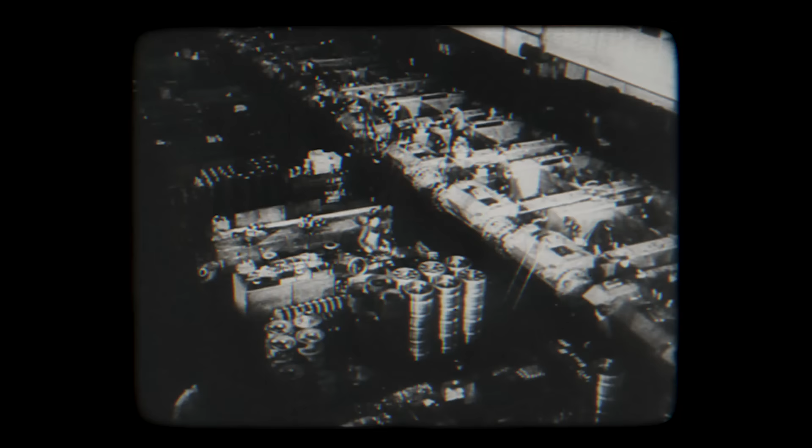The Panzer IV proved itself to be upgradable, ensuring it was still extremely potent and relevant in the conditions of 1944. Now let's take a closer look at the differences between them.

The first thing to think about is armour, and that represents one tank's ability to survive a hit or multiple hits from another. When you look at the shape of the two tanks, obvious differences hit you. The Panzer IV is quite boxy, whereas the Sherman has sloped armour on the glacis. The thing to remember here is that the Panzer IV is a pre-war design. The original spec goes back to 1934, and sloped armour, which not only increases the line of sight thickness of the metal itself, but also increases the likelihood of a ricochet, isn't widely adopted until later.

In fact, the Panther is the first German tank really to use it. The earliest model, Panzer IV Ausführung A, was pretty thinly armoured. This is actually an Ausführung D, but it's been fairly heavily upgraded, so it's not much different to the Ausführung H, the later model, which is the one you'd most often encounter in Normandy.

Now, this tank originally had 30mm armour on the turret and on the glacis, but it's been beefed up. There are multiple Vorpanzers on the glacis, there's applique armour on the hull, so actually it's a much tougher nut to crack. It would also have had Schürzen, skirts, or I think in German it's more properly aprons, around the turret and also along the sides. They, I'm afraid, are now missing.

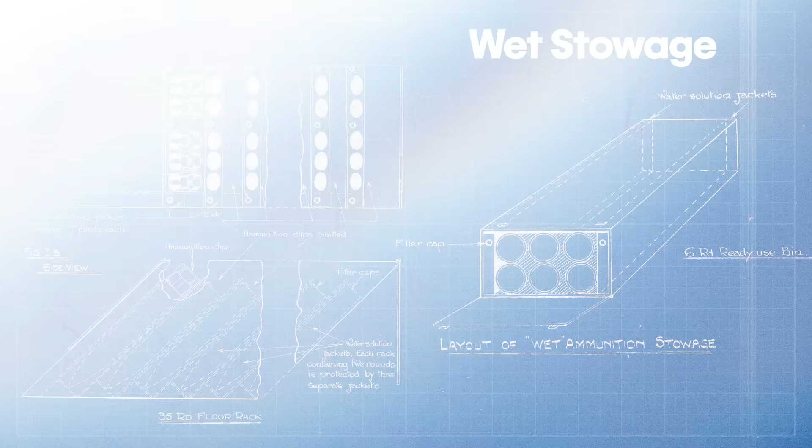Now, they did realise this, and the problem was fixed when there was a redesign. The ammunition was moved further down the hull and into wet stowage, which stopped it cooking off. But that doesn't happen until later in the war, until late 1944. And the tanks we're talking about in this engagement, our Shermans, didn't have it. So both of these tanks have benefited from some up-armouring, but the Panzer IV in particular has a lot more protection than it would have had as it originally came out of the factory in the 1930s.

From taking hits to giving them out, both the Panzer IV and the Sherman have 75mm guns, which are capable of putting the other out of action. Not only was the Panzer IV up-armoured during its service life, it was also up-gunned. Now, it starts out as a Begleitpanzer, and that's a support tank for the Panzer III, which is intended to be the main gun tank. As such, it was equipped with a short-barreled KwK 37 75mm gun. And what that's supposed to do is deal with things like anti-tank guns, similar targets that the Panzer III's 37mm gun wouldn't cope with.

As the Panzer III became obsolete, the Panzer IV assumed its role as a gun tank, and it was up-gunned to a long-barreled KwK 40 7.5cm gun. The British in North Africa, when they first encountered the up-gunned Panzer IV, soon realised the potency of this gun and termed the tanks Panzer IV Specials. The Sherman was built to carry one gun. This one, the M3 75mm.

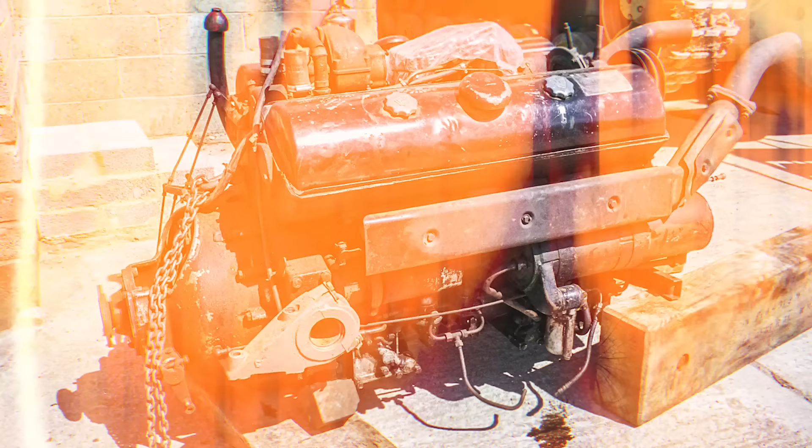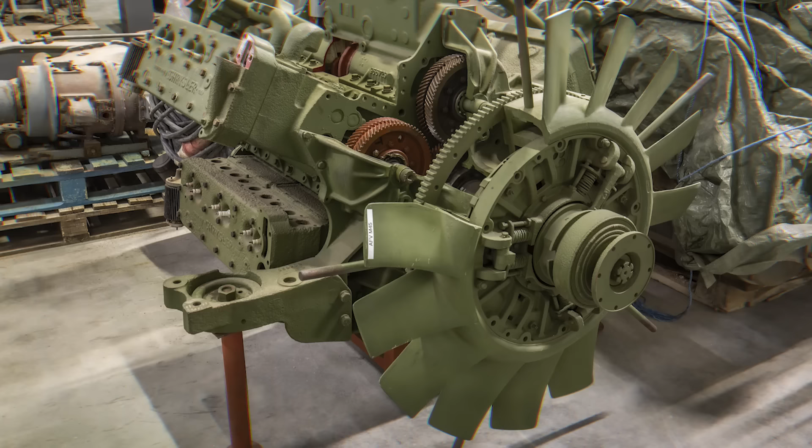The Panzer IV engine is a Maybach HL 120 TRM, the same as used in the Panzer III, and the SSG 76 transmission, a synchromesh gearbox with 6 forward and 1 reverse gears, is very sophisticated. This makes the vehicle easy to drive, but it comes at the cost of ease of maintenance and repair. This M4A4 has the Chrysler multibank engine, which is surprisingly reliable despite being complicated, and it has a Caterpillar synchromesh gearbox with 5 forward and 1 reverse gear.

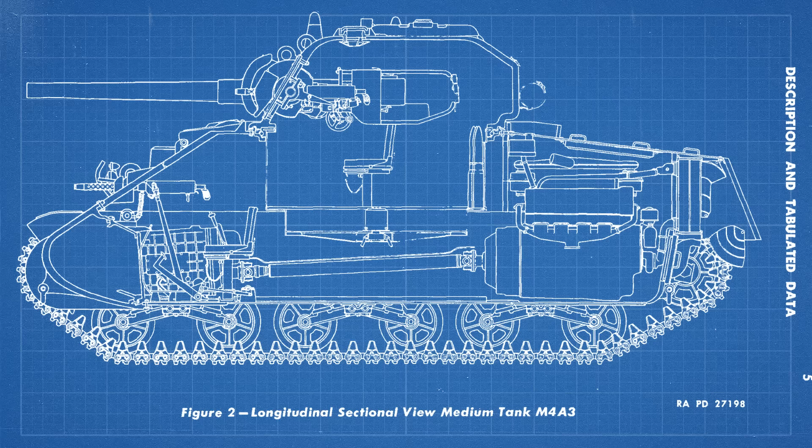The downside of this engine is the impact it has on the height of the tank. It's only 30 centimetres taller than the Panzer IV, but it's got an almost top-heavy appearance. This is because the engine itself was tall, so the engine bay had to be tall to accommodate it. It's also because it's rear-engined, but with a gearbox at the front, meaning the drive shaft has to pass under the turret basket, and that gives you the humped effect.

Both tanks have a crew of 5, which is quite normal for the time. So you've got a commander, gunner, loader, driver, and hull machine gunner. But the ergonomics and the actual crew dispositions vary. Where the Panzer IV does score over the Sherman is the commander's position here. This is what we call the throne. He is centre rear of the turret, and he's got an armoured cupola with 5 vision blocks. So that's excellent situational awareness, even when closed down. And of course, if he needs to, he can open the hatches and stick his head out.

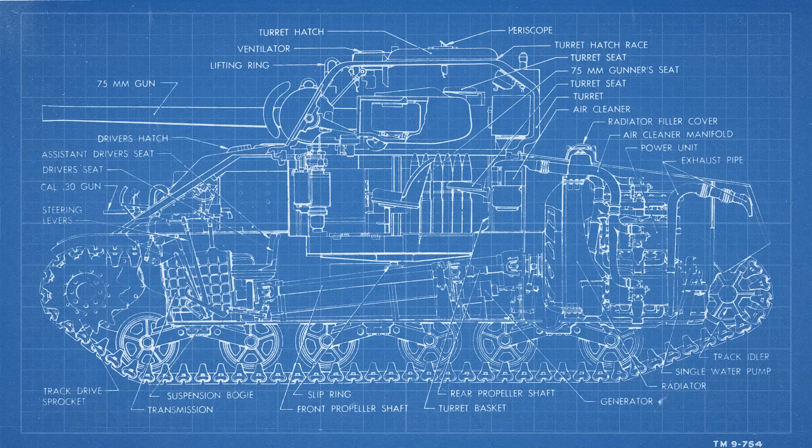Sherman commanders, certainly in the early marks, just had a periscope on a traversing mounting, meaning they were forced to spend a lot more time with their head and shoulders exposed through the hatch. Another difference between the two is that in the Sherman, the radio kit is in the bustle at the back of the turret, and that means the commander, assisted by the loader, has the job of keeping the set on net, which must have been something of a distraction.

In the Panzer IV, the bow gunner also acts as a radio operator. Now that frees up the commander, but against that, the Funkgerät 5 set is low powered. It's only got a range of about 4 kilometres, and that is less than a third of the No. 19 set used in British crewed Shermans. Oh, and being an AM set, the FuG 5 suffered from massive static interference when the tank was moving.

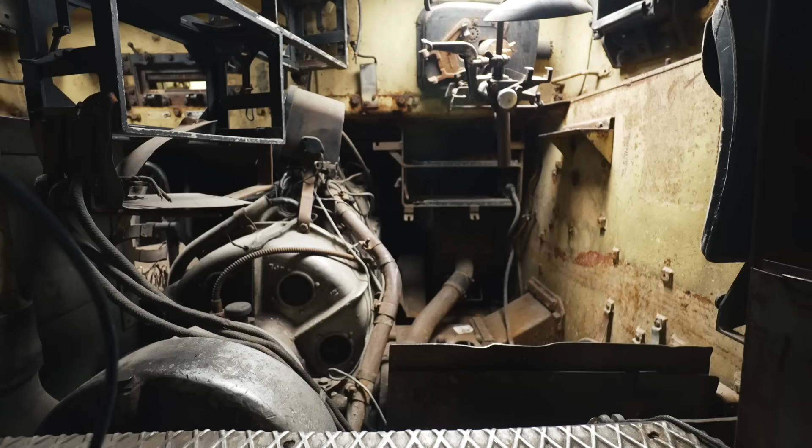The bow gunner also has a dedicated sight for his MG 34, which could put accurate rounds on the target, compared with the bow gunner in the Sherman, who can only aim his .30 cal MG through a basic periscope. This lack of a dedicated sight means the Sherman's MG can only really be used for suppressive fire.

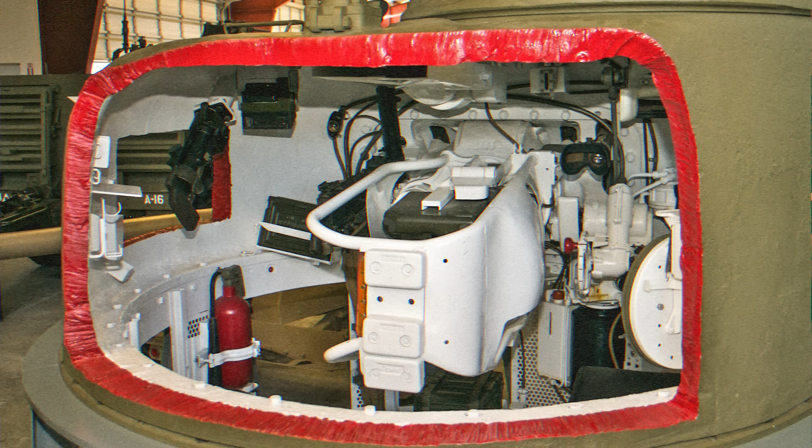In the Panzer IV, the gunner sits on the left-hand side of the gun, and you can see his manual elevation and traverse wheels, and also the azimuth indicator. And we've also got the excellent Turmzielfernrohr 5b, 2.5 times magnification telescopic sight. In the Sherman, the gunner and loader's positions are reversed.

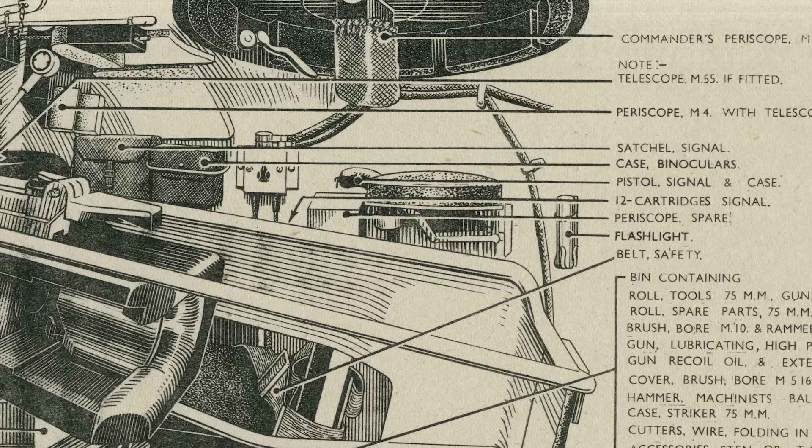The loader's on the left and the gunner on the right. Initially, the only gun sight was periscopic, but in an early improvement, the gun mount was redesigned to add a telescopic sight. This meant greater accuracy through the 3 times magnification M55 coaxial telescopic sight and a wider field of view through the M4 periscope. The best of both worlds.

For the driver, both tanks are easy to drive and light on the controls. Both have similar mobility, a top speed on the road of 35 to 48 km an hour for the Sherman and 38 to 42 km an hour for the Panzer IV, although both speeds are more or less halved off-road. The vertical volute spring suspension of the Sherman gave a notably smoother ride than the leaf spring arrangement of the Panzer IV. If you're doing a lot of miles, particularly across country, that will make a difference to crew comfort and performance.

So, by mid-1944, there's not actually a great deal to choose between the Panzer IV and the Sherman. Panzer IV has got the edge in terms of firepower and the commander's situational awareness, but the Sherman has got a faster turret traverse, and the gunner's got an advantage because, of course, he's got a periscopic and a telescopic sight. To understand how these tanks would perform against one another, we can look at a short but violent action, which would be repeated across Normandy when Sherman and Panzer IV went head-to-head.

The date is the 28th of June 1944. It's 3 weeks on from the D-Day landings. The Allies have yet to secure a breakout from the Normandy beachhead and capture the strategically vital city of Caen. As part of Operation Epsom, 3rd County of London Yeomanry, part of 11th Armoured Division, are attacking enemy positions on the River Odon. The Germans were wrong-footed by Allied deception into thinking that the landings were going to happen in the Pas de Calais, not in Normandy. But what that means is most of the major armoured formations weren't able to intervene until the Allies were preparing to break out.